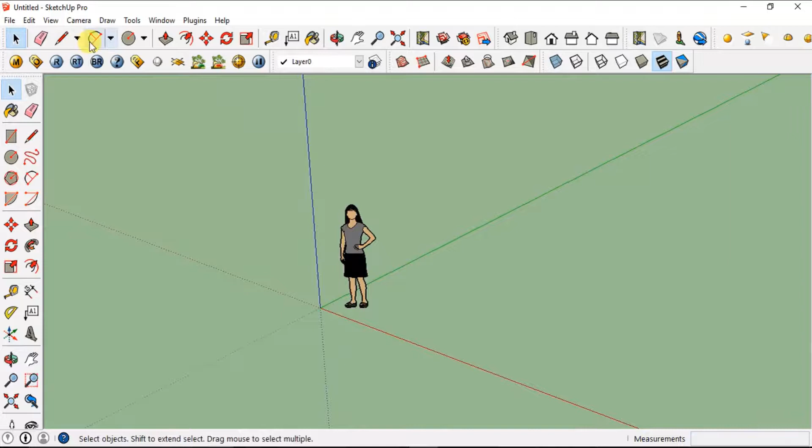I'll now just use this eraser tool to delete this girl on the SketchUp. And now, let's get started.

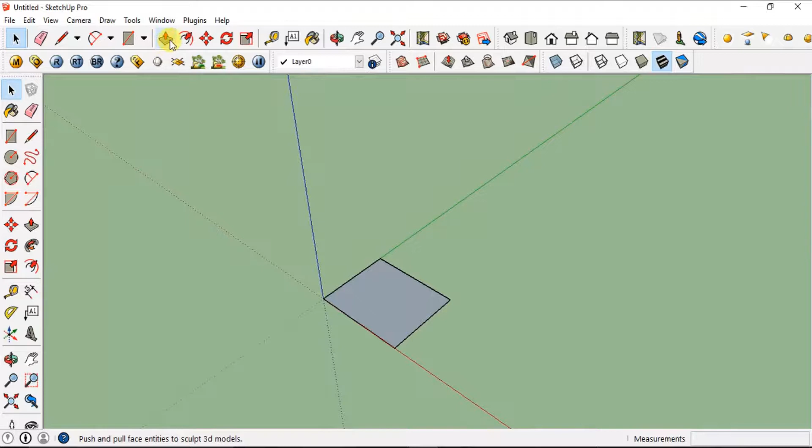First I would take this rectangle tool and show you how you can draw a rectangle very easily on SketchUp using this tool. You can see a rectangle has been made, and now I would use this push and pull tool to show you how you can make a 3D shape out of a rectangle.

You just have to click on the surface and push it in any direction you want it to be pushed, and you can also give the distance. You just type the distance on the keyboard, and you can see it has been pushed to that distance, so a cuboid has been made out of it.

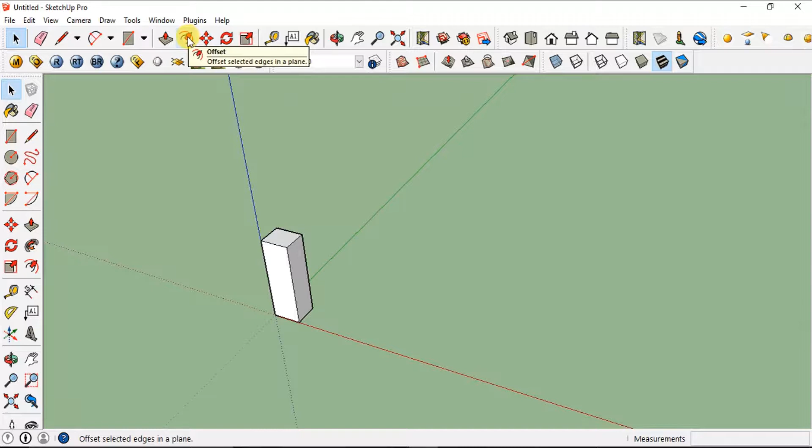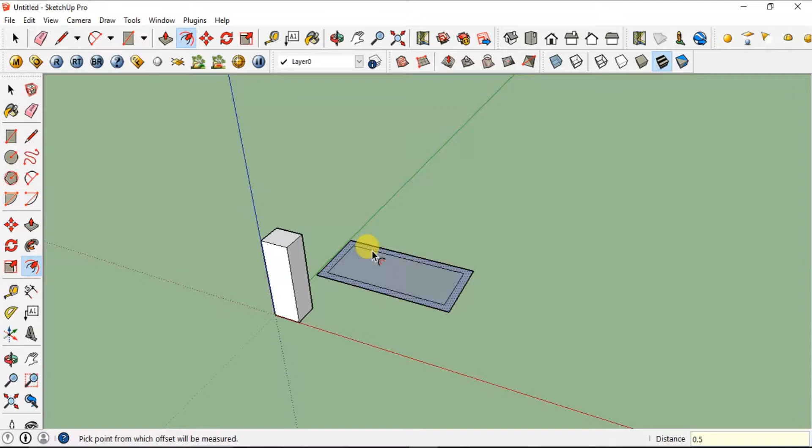Now I'll show you how to use this offset tool. I'll draw another rectangle, select the offset tool from here, then click on the surface, and you can see an offset can be drawn. You can also do this at a desired distance entered from the keyboard, like I just entered 0.5, and you can see another rectangle has been created inside the rectangle.

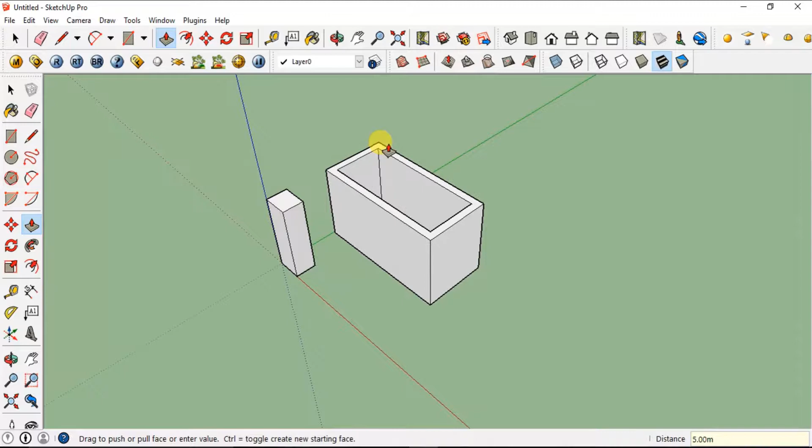Now you can see these two surfaces have been distinguished; they're being selected separately. So you can select any one surface and extrude it, push or pull it to any desired distance, and make any box out of it. Or if you want to make a hollow cuboid, you can delete the space surface just by pressing delete on the keyboard, and you can see the hollow cuboid has been made.

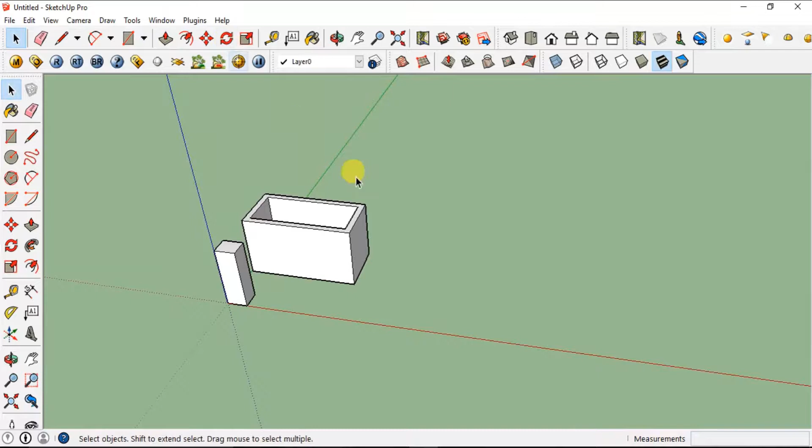Okay, now moving on to the next tool, this is the rotate tool. I'll show you how you can use it. For this, you have to select the entire object that you want to rotate.

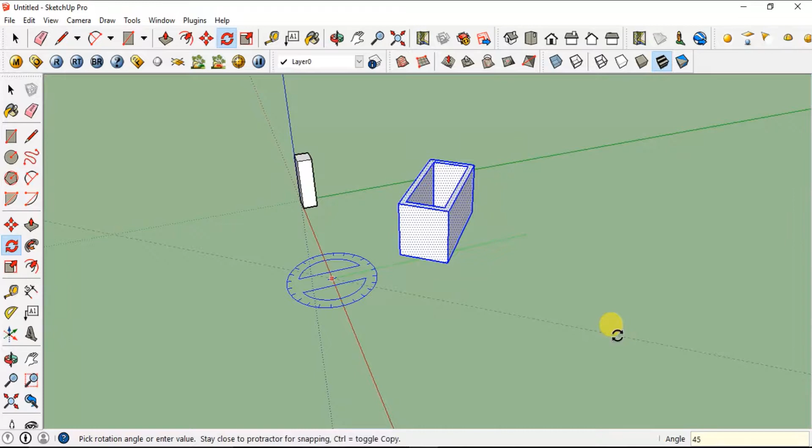SketchUp basically has three axes: red, blue, and green. When the blue circle comes, it means it's being rotated perpendicular to the blue axis, that is the vertical axis. You can rotate in this way, and you can also enter the angle you want it rotated to. Like I just entered 45 degrees, and the cuboid has been rotated to 45 degrees.

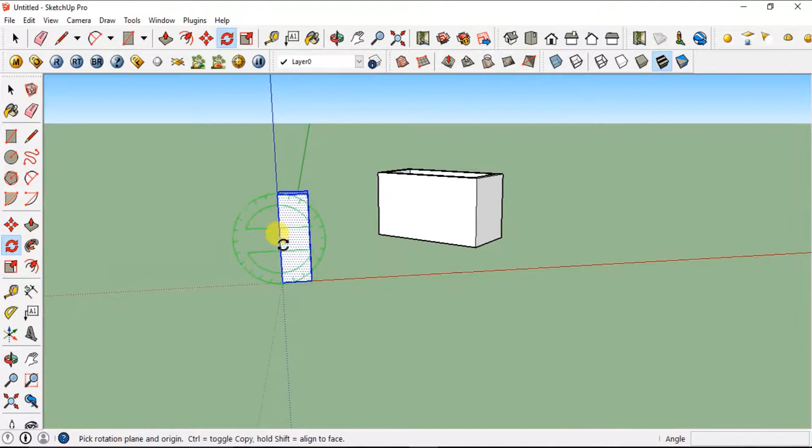That was rotation on the blue axis. Now I'll show you how to rotate on the other axes. I'm selecting the smaller cuboid, and you just select the face on the axis you want to rotate. After selecting this face, it shows the green axis, so you can rotate on the green axis this way, and again enter the angle if you want a particular one. You can see it has been rotated on the green axis.

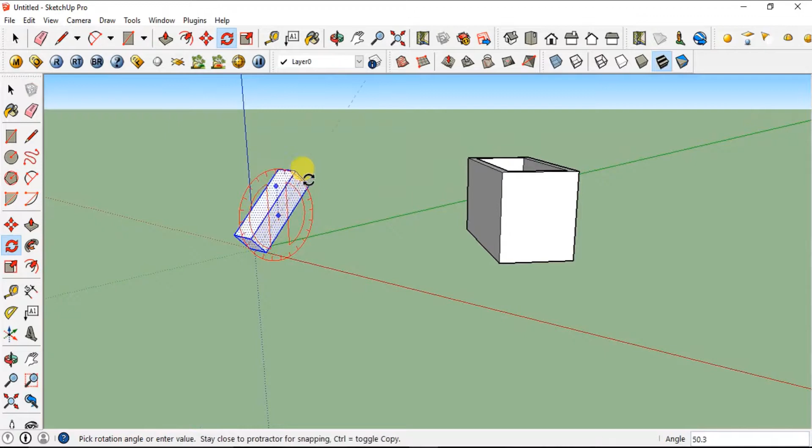Now I'll show you how it can also be rotated on the red axis. I've just selected that face, and it can easily be rotated on the red axis too. So this was the rotate tool, very easy to do.

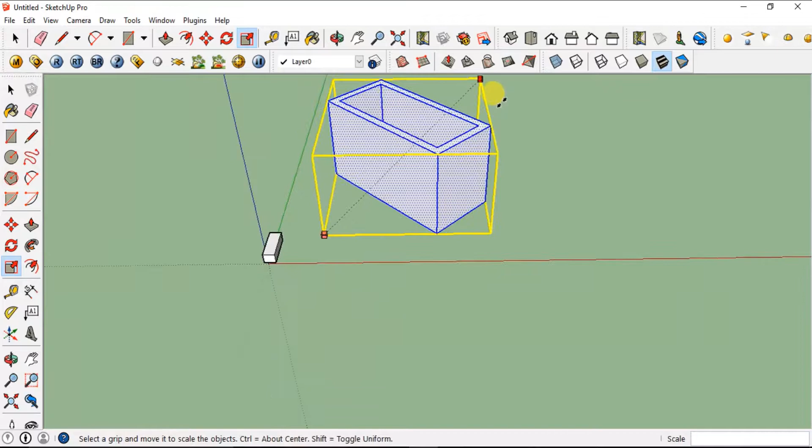Now moving on to the scale tool. For this also you have to select the entire object you want to scale, click on the scale tool or press S on the keyboard, and select these two corner points. You can scale it to the desired distance, or enter the scale factor. For example, I entered 2, so the scale has been doubled.

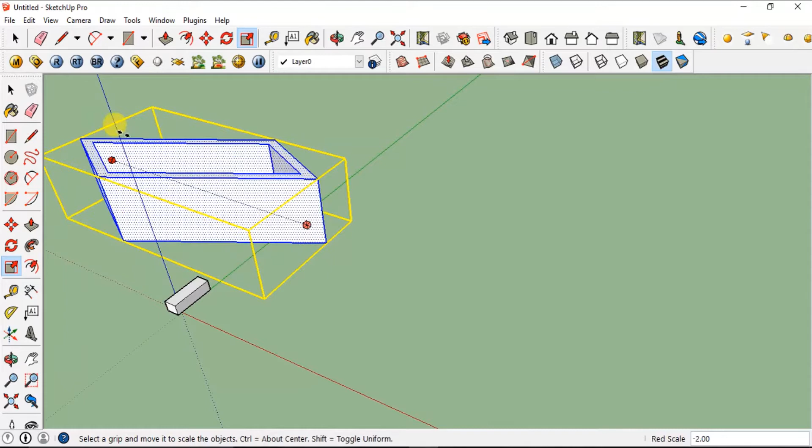You can also select these small points and stretch the object in any direction you want, like this. You can also scale it upside down or anything, just stretching the object using these red dots in the scale.

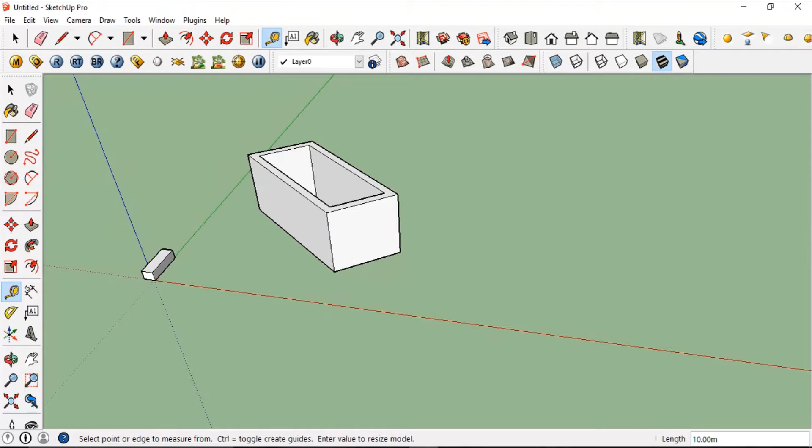Now I'll show you the use of this tape tool. You can use this to take dimensions; you can see at the bottom that dimensions are mentioned. I've selected 2 points and it shows 10 meters. This is just for your reference, to check whether your drawing is correct or not, which is very helpful.

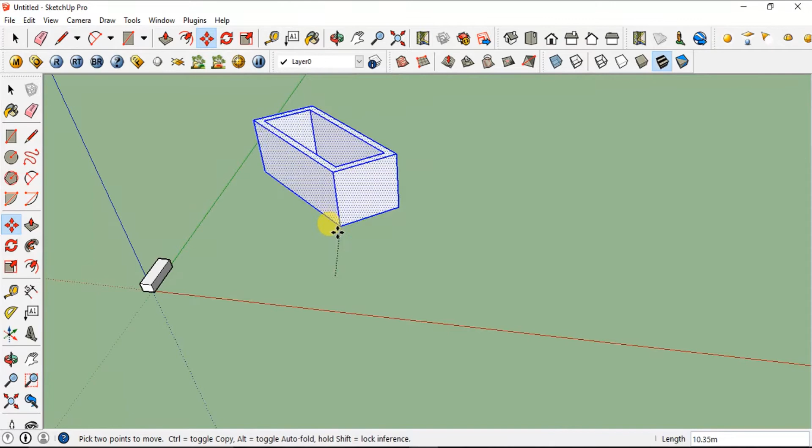Now I'll show you how to move an object using this move tool. You can also press M on the keyboard to use this tool. You just select the object, click on the tool, and move it to the desired direction, keeping in mind you should see the green, red, or blue line as you move it.

If you want to move it on the X axis, that is the red axis, or the green axis, you should follow the lines so it doesn't get distorted or moved to the wrong place. And if you want to move it vertically, height-wise, you should follow the blue line. So that's all for this video.